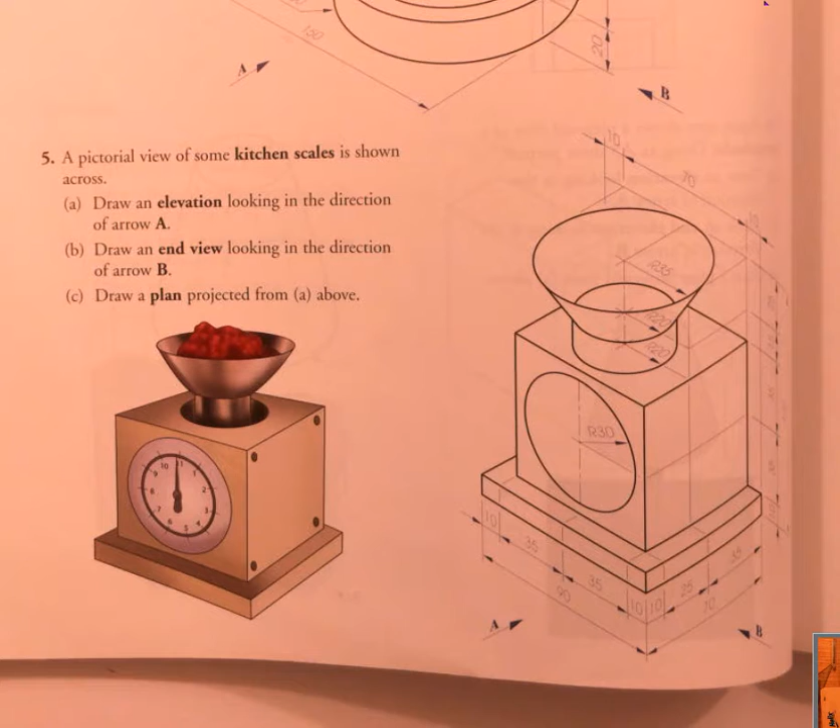Okay, we're going to do the orthographic projection of the question on page 118, question number 5. It says a pictorial view of some kitchen scales is shown across. Draw the elevation looking in the direction of arrow A, draw the end view looking in the direction of arrow B, and draw the plan projected from A above.

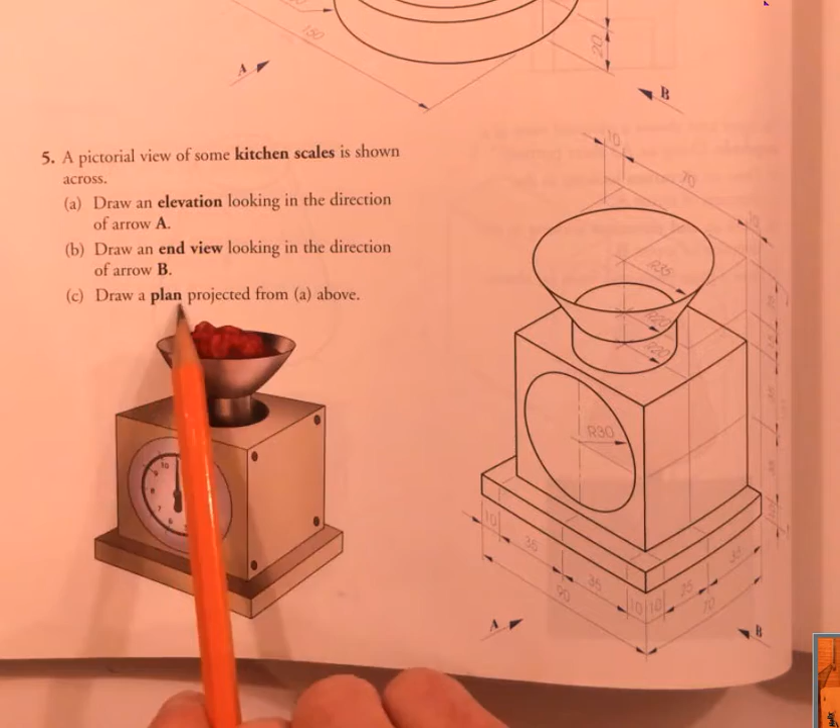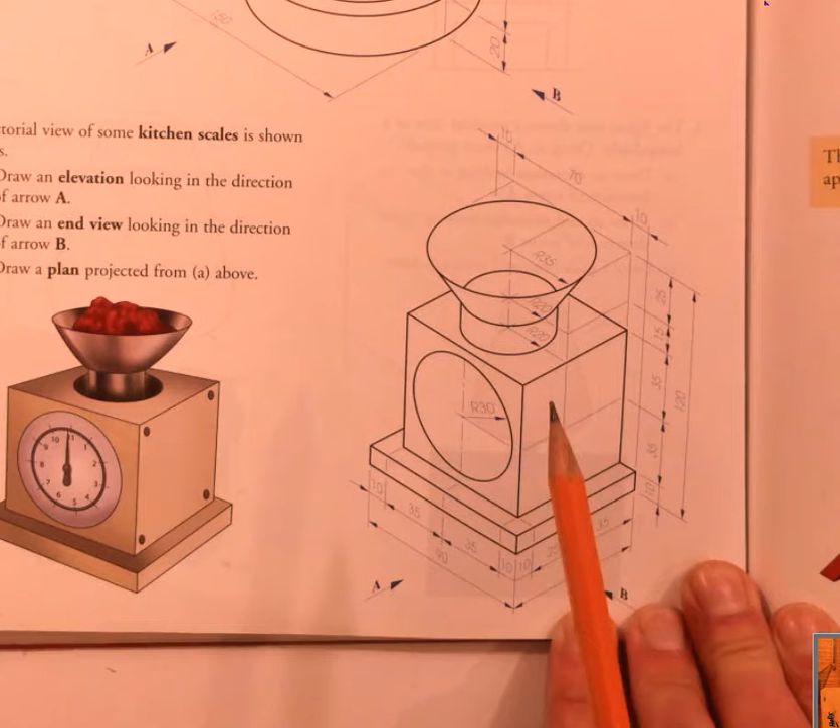So direction A, this is our elevation, meaning this is the front of the scales. It's saying the end view is looking in from the right hand side. So if I shine the torch in from the right hand side, the image is going to end up on the left. So when I get to this question, I'm going to have the elevation and then the end view is going to go to the left hand side.

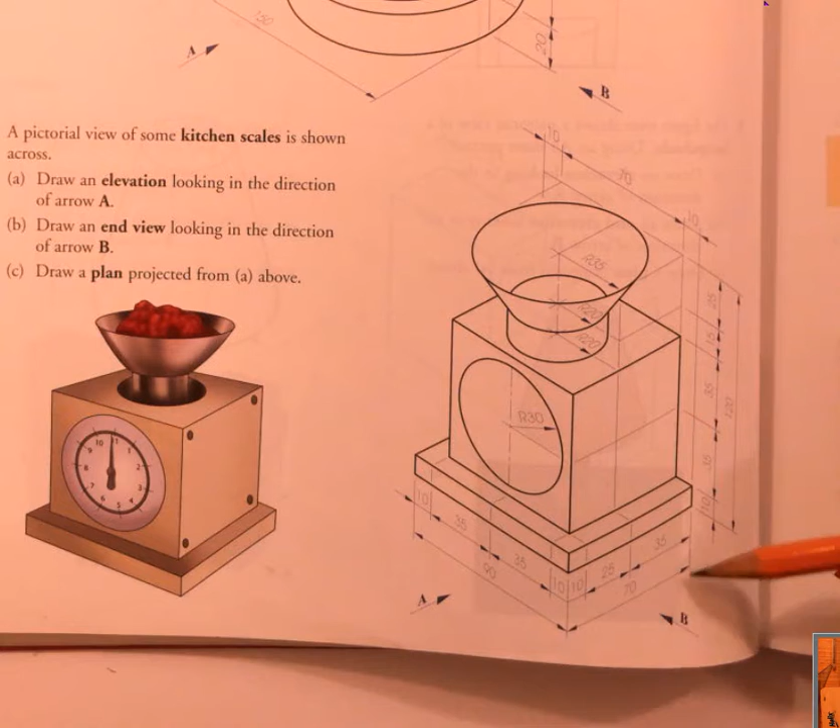The question then says draw a plan from A above. So I'm going to draw an elevation and plan, and my end view, we said, is going to go on the left. It's fairly straightforward to draw. It's 120 high overall, 90 millimeters wide, and overall 70 millimeters deep from front to back. So we can go about setting it up.

When we draw circles, we always draw them in the view where you see them as circles - I'll get more to that in a minute. I'm going to start off by setting up just the scales itself in elevation, plan and end view, in other words the box itself. This circular section I'm going to leave.

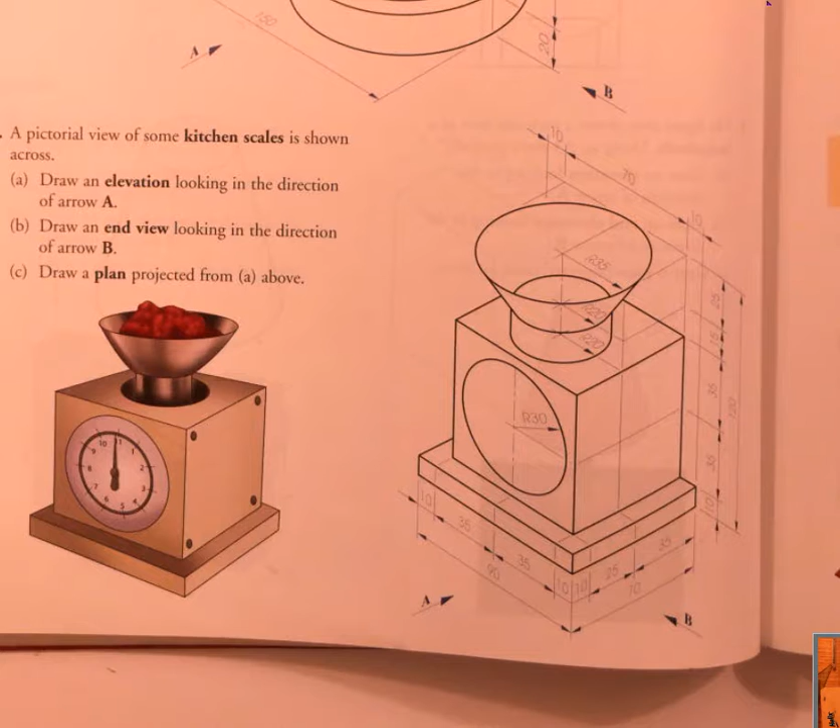Okay, so I've set up the main body of the scales in my elevation. I'm going to project that down to my plan view now, so I'm going to take all of my widths down to plan. I've got 4 lines to project down here.

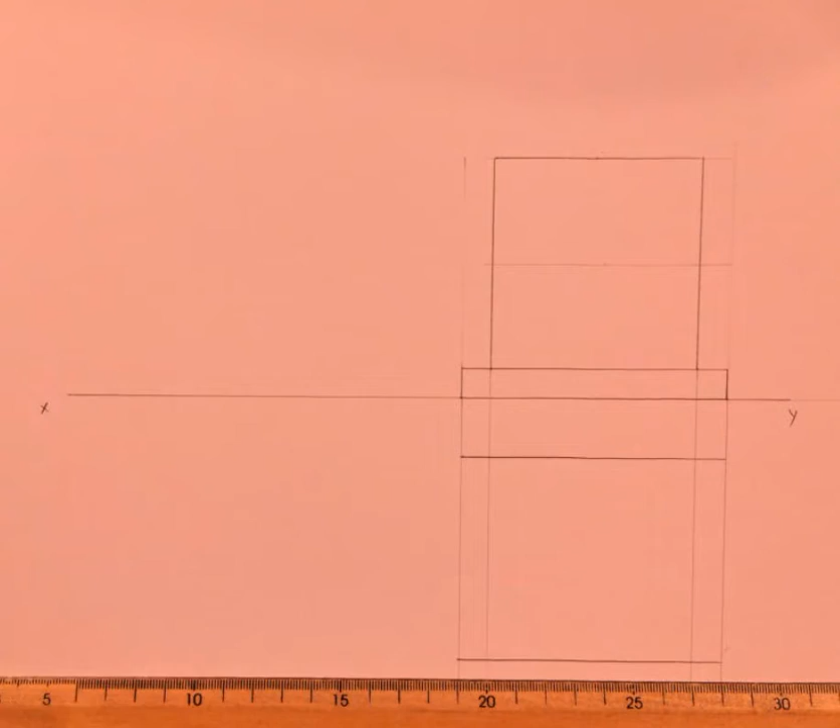We always step down 20 millimeters to start the plan, so that's the back of the plan. From back to front, it said the scales is 70 millimeters. So 90 wide by 70 - I've already got the width taken from elevation, so I can just draw it in. Here is my plan view of the base piece. The base, it said, was 70, which I measured from back to front, and we have the base.

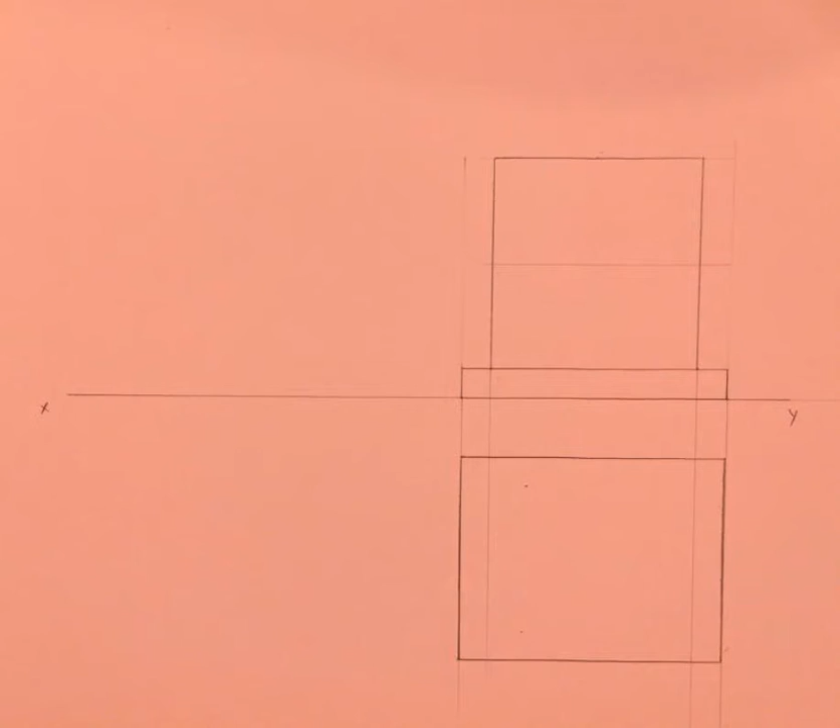The actual piece for the weighing scales is 10 millimeters smaller all the way around. So it's just a matter of measuring in 10, and I've got the 2 sides taken down from the elevation. So here is the outline of the main body of the scale. I've got the base in plan and the main body drawn in there.

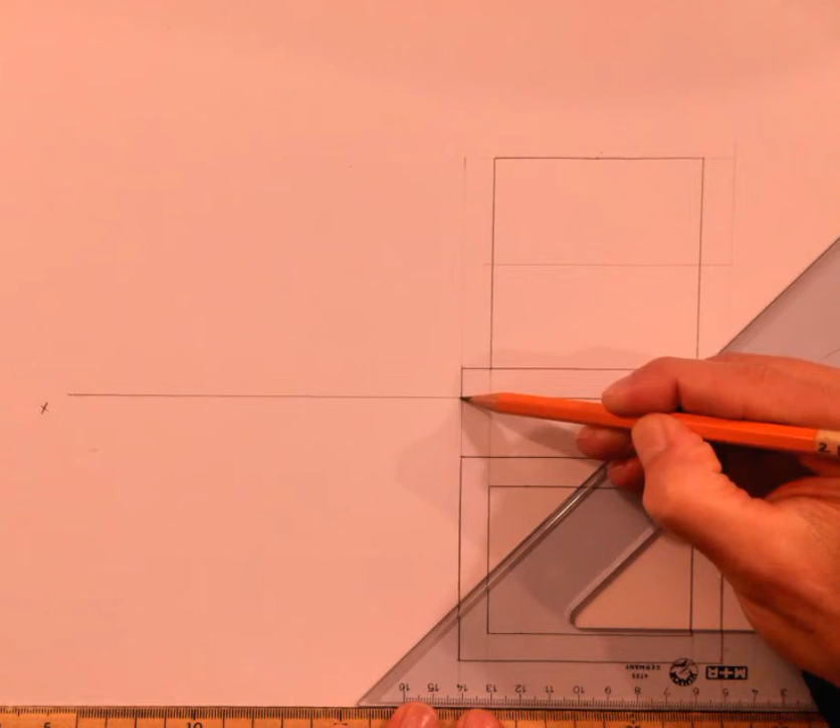Now we need to find those in the end view. I've left space on the left hand side for my end view. Again, the edge of the elevation and plan where it crosses the XY line, here it is - I'll draw it in again with a broken line. I'm going to take my heights from elevation and my width or depth from plan, from back to front. So the base is the first piece I'll set up.

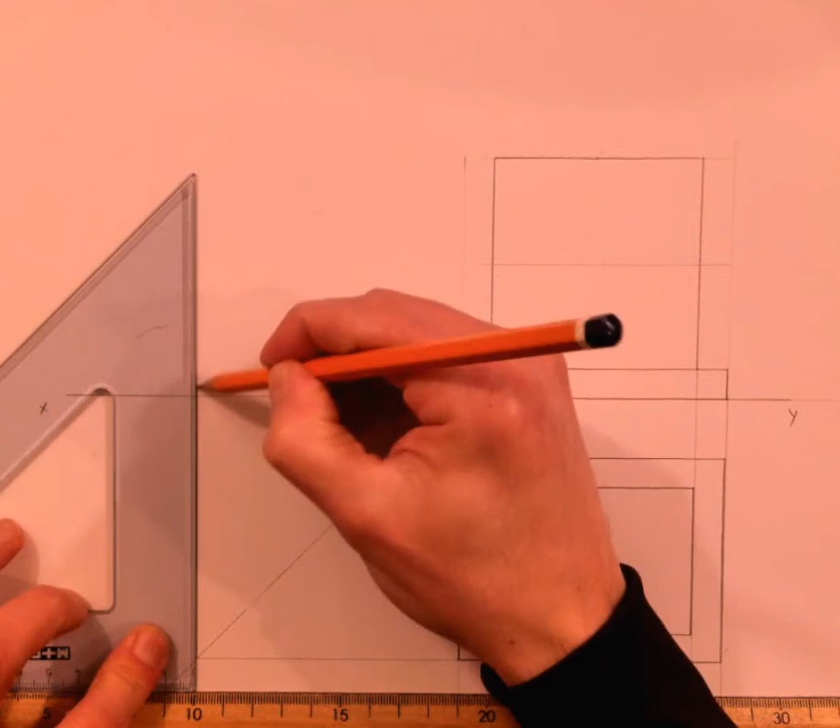I'll take the base out of my plan view across, and I'll take the back of the base across. I'll bring those up to elevation, and again I'm taking the height of the base - the base was 10 millimeters high. I'm going to take that across. And here is my base drawn in the end view.

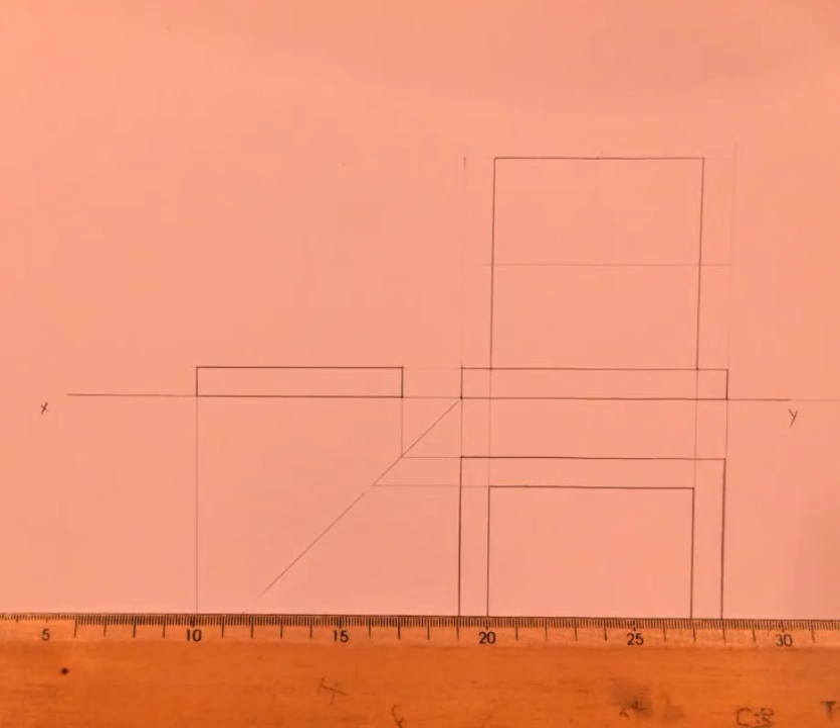So I've got the base set up. I need to set up this main body in the end view. I've got the main body here and here in plan, and again it's the same setup. I'll take my points out of plan - the front of that main body, the back of the main body - and bring those to elevation, up to elevation. So again, it's always where it hits that 45-degree line.

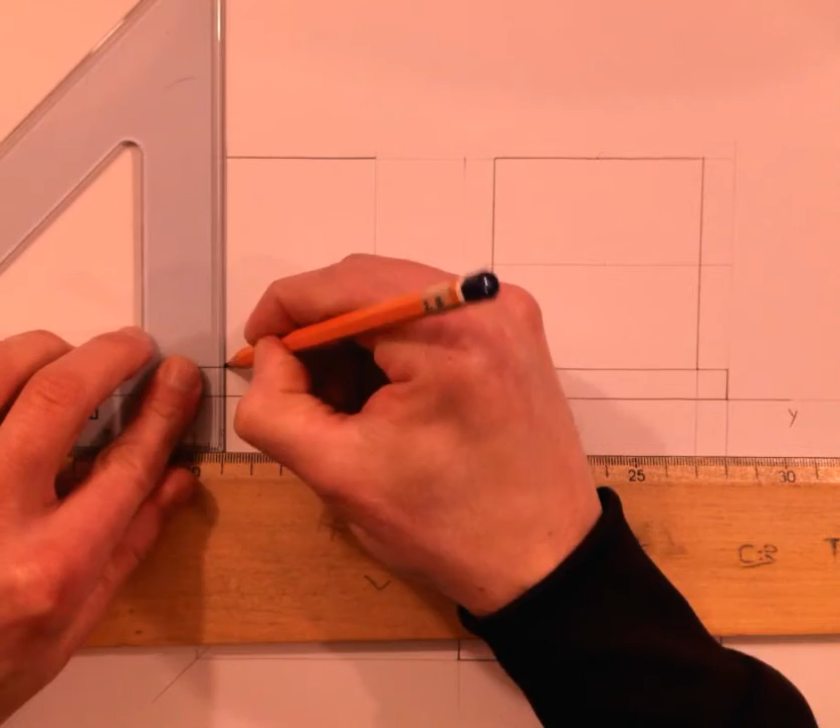Here it is, height of it, take it across. That gives me the height of the main body. So I've connected the 3 views together now properly. I've copied the depth, which was 50, up for this.

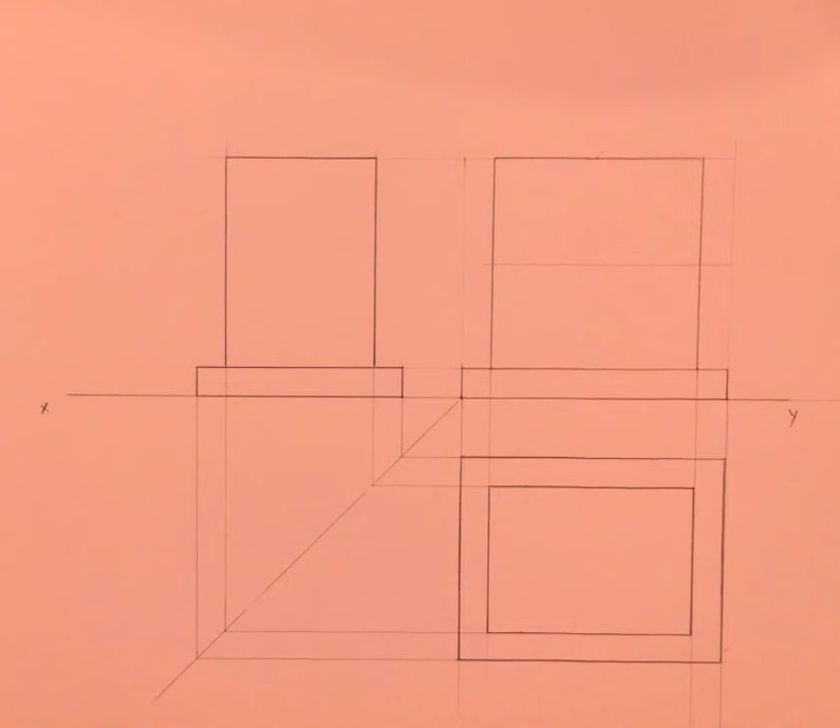Now it's a matter of drawing in the circular sections. The first circle I see is on the elevation, and it is radius 30 millimeters, in the center of this face. I've got 2 ways of finding the center - I can measure up half, which is 35, and measure in to get the center. But the handy way to find that middle is I can join the diagonal, so I'm just going to join the diagonal and join the diagonal. That gives me the center.

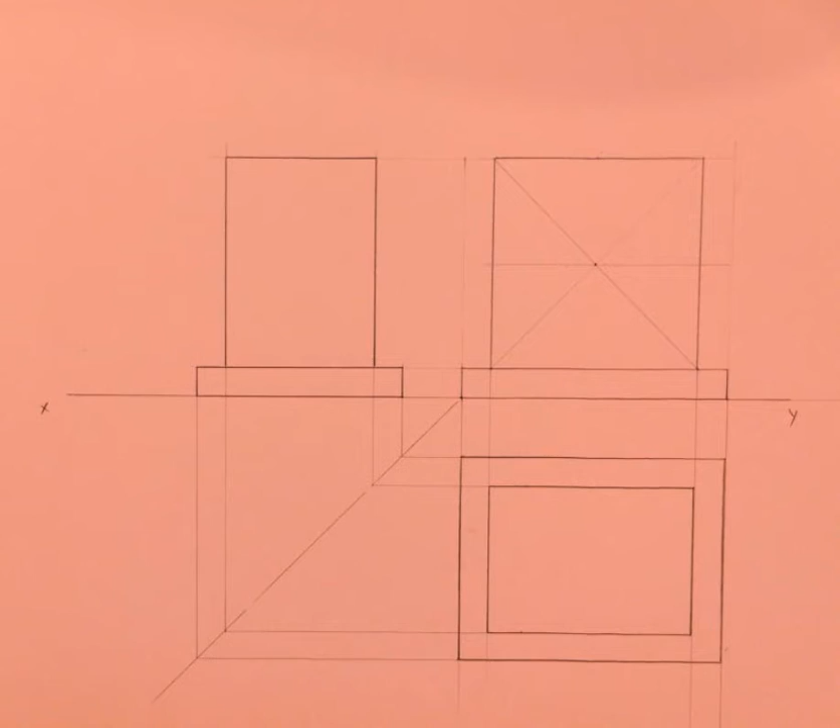That's our front end. I've got this top section here where we put all the ingredients into, but I'm not going to draw them in the elevation. I drew this circle here in elevation because it's the true shape. In other words, it looks like a circle. It's the only view I'm going to see that looking like a circle.

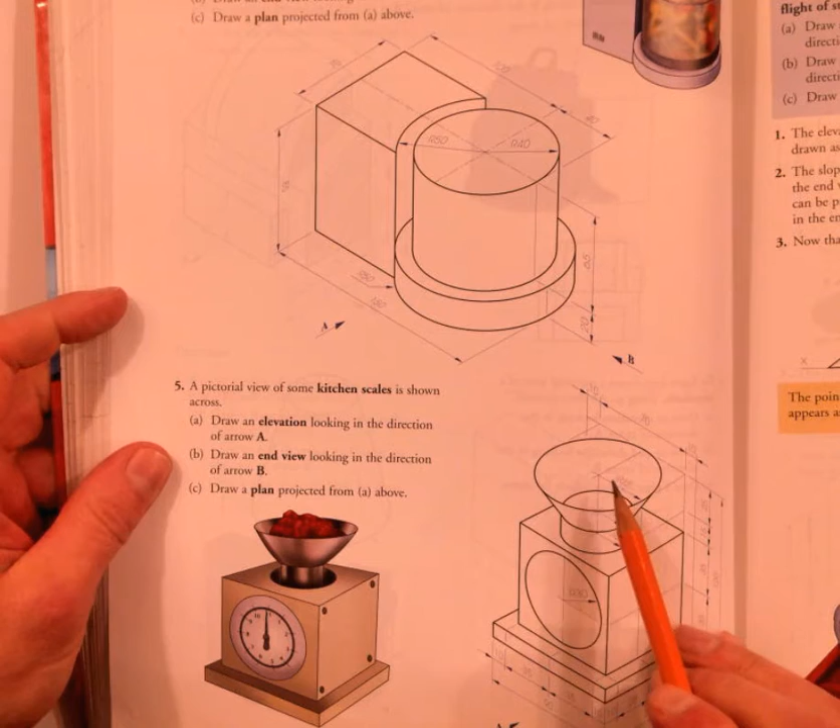When I come back to my question, the funnel shape here, I'm not going to see them as circles. I've got two circles, radius 35 and radius 20. I'm not going to see those as circles in elevation. I'm not going to see them as circles in end view. I'm going to see them as circles in the plan. That's where I'm going to draw them. So it's radius 35, radius 20.

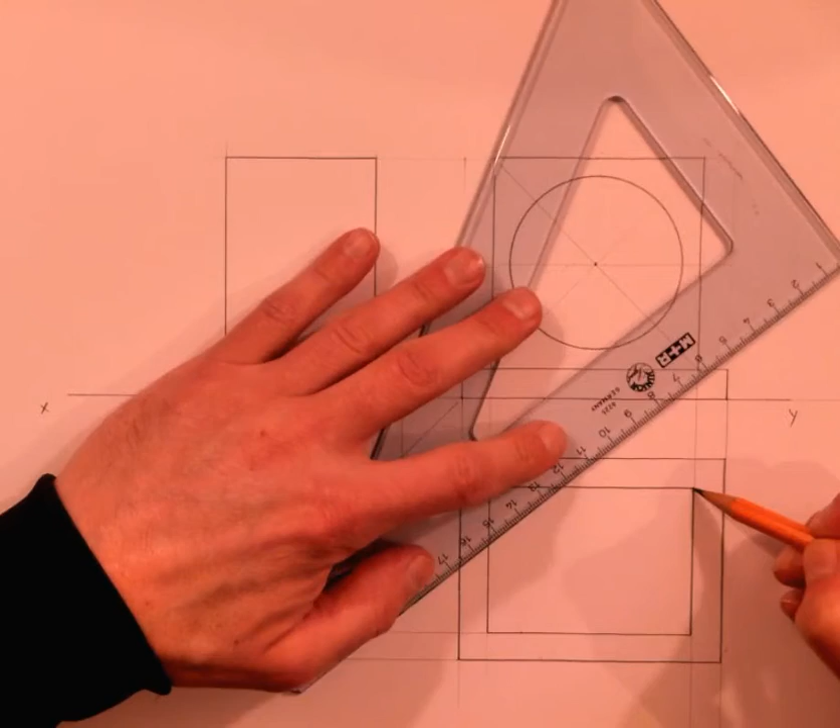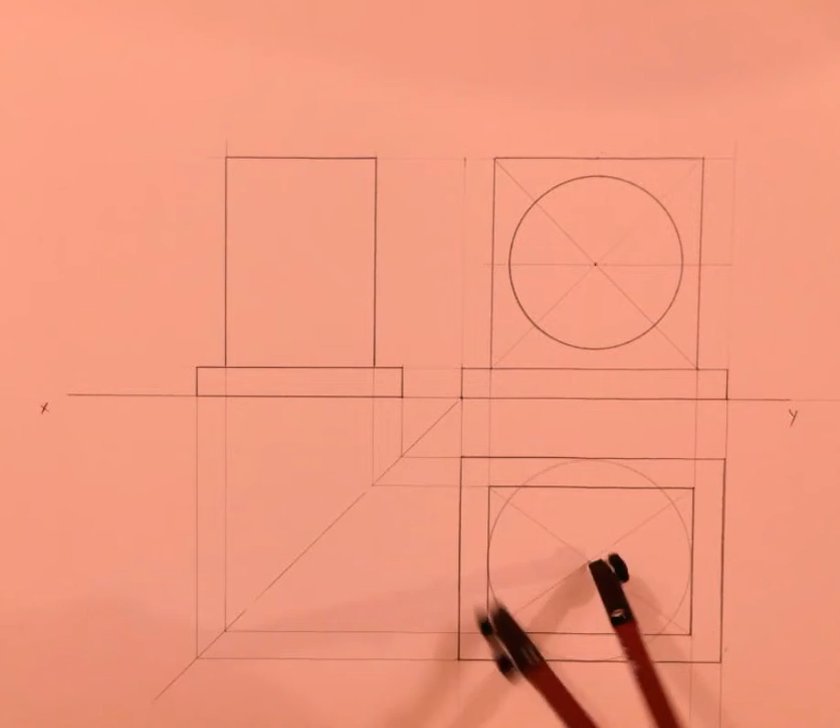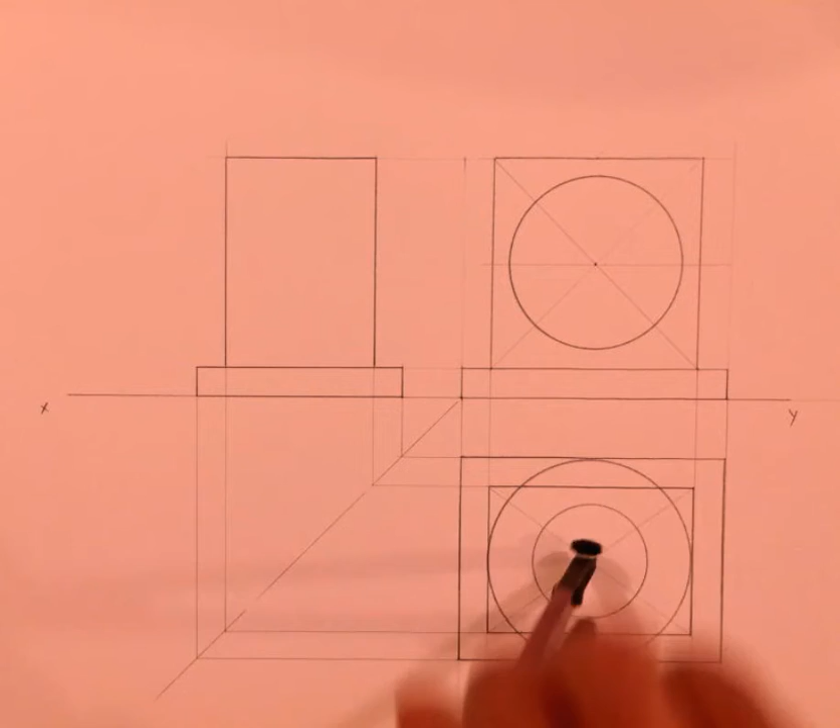So when I come down, again, they're in the center of the body. So I just come along, easy way to join, or to find the center, join my diagonals. Nice and lightly. Again, it's radius 35, so I'll take my radius 35, and radius 20. So those are my two circles in.

Now I'm going to take out these lines because you won't see them. I was only drawing them in dark so you could see them on the visual. Okay, so I've got my funnel section drawn in the plan view.

I'm going to bring that up to the elevation now, and my widths are going to be taken from the plan. So I'm going to put a little construction line across here, which is a center line. Again, it's darker than I should be making it, but I want you to be able to see it. I'll even have to go a little bit darker, I think.

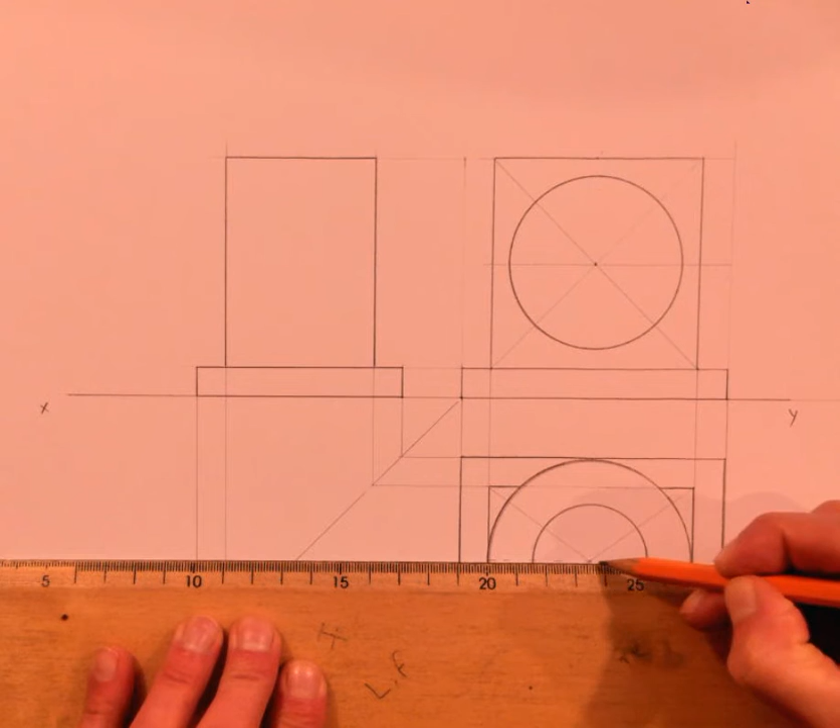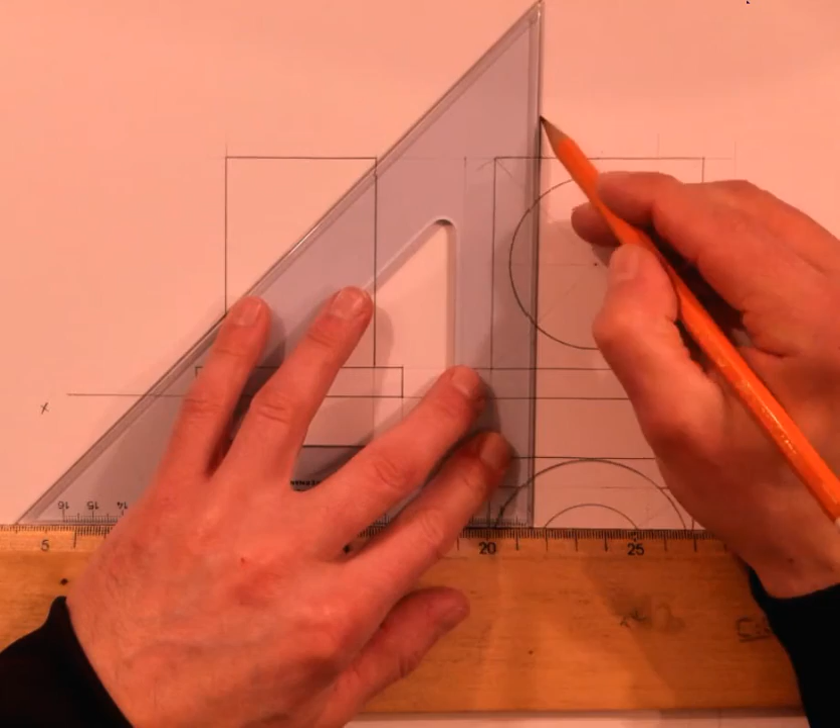So I'm putting a center line through the center of the circle. The width I'm going to take up is for the first part of the funnel, so the smaller section of the funnel. Here is one side of it, so the radius 20 section, and the other side of it. And the height of that in elevation, it said in the question, is 15 millimeters. So I come up, I projected up each side of the funnel and measure up 15 millimeters.

That allows me to draw in the funnel in the elevation. So this is the kind of base part of the funnel drawn in.

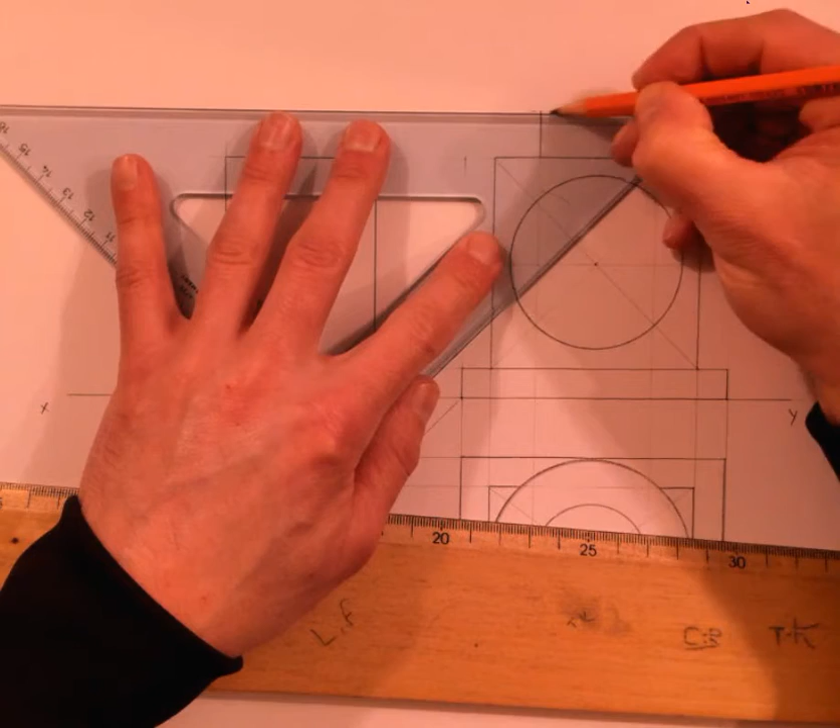The top of the funnel, the widest point, here it is, it was radius 35 in plan. I'm going to take those two points up as well, so the widest points. And use just a bigger set square. So I'm projecting that up, and projecting up.

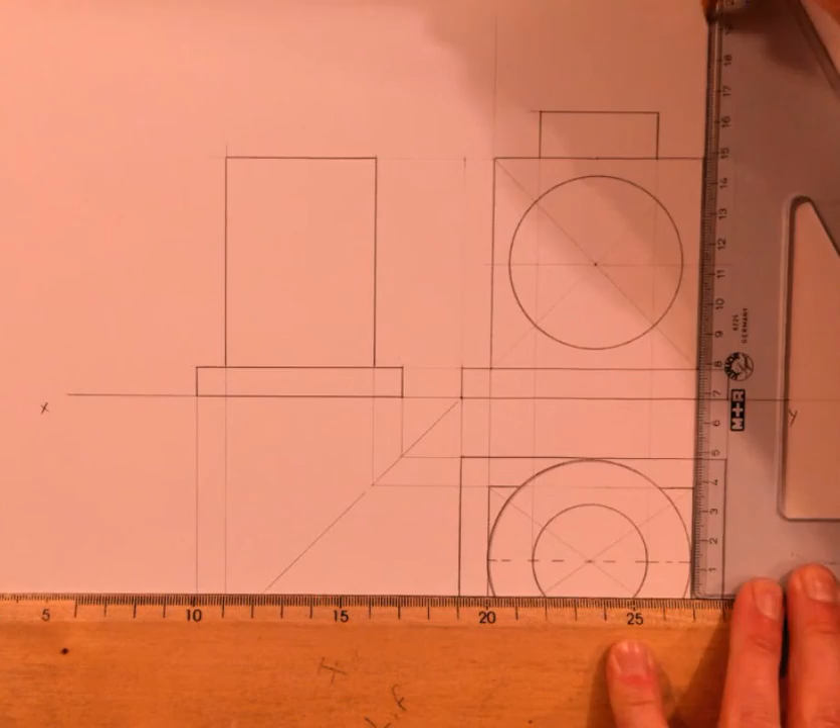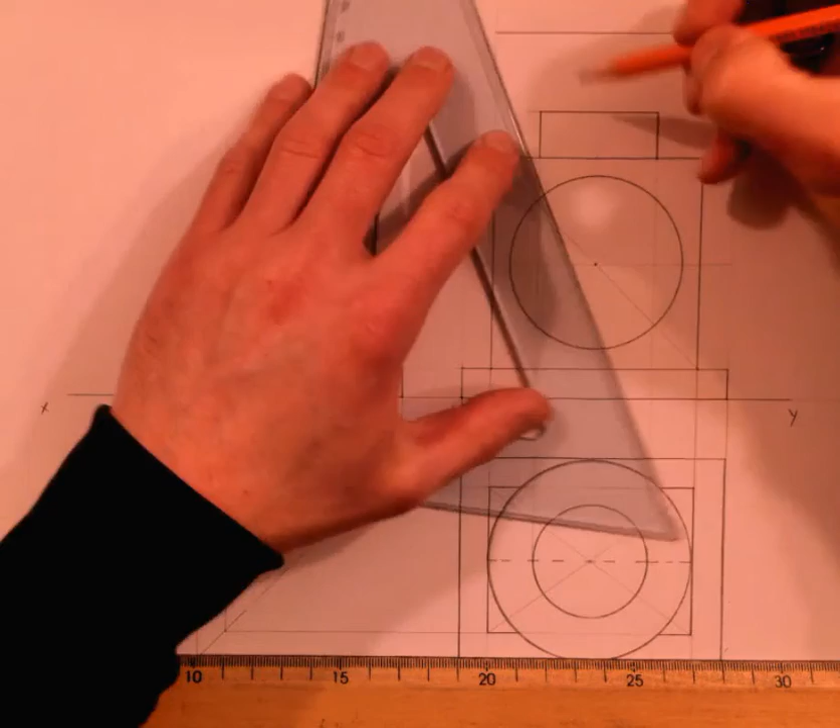And that was up 25 millimeters from the lower part. So up 15 and then up 25, and then what that has given me is the top of the funnel. Here's the top of the funnel, join back down. I've got the funnel in elevation.

Now I need to come along, draw the funnel in end view. I'm going to take the heights of the funnel. So my 15 will come across, my 25 will come across. So I've taken the height of the lower part and the upper part of the funnel across.

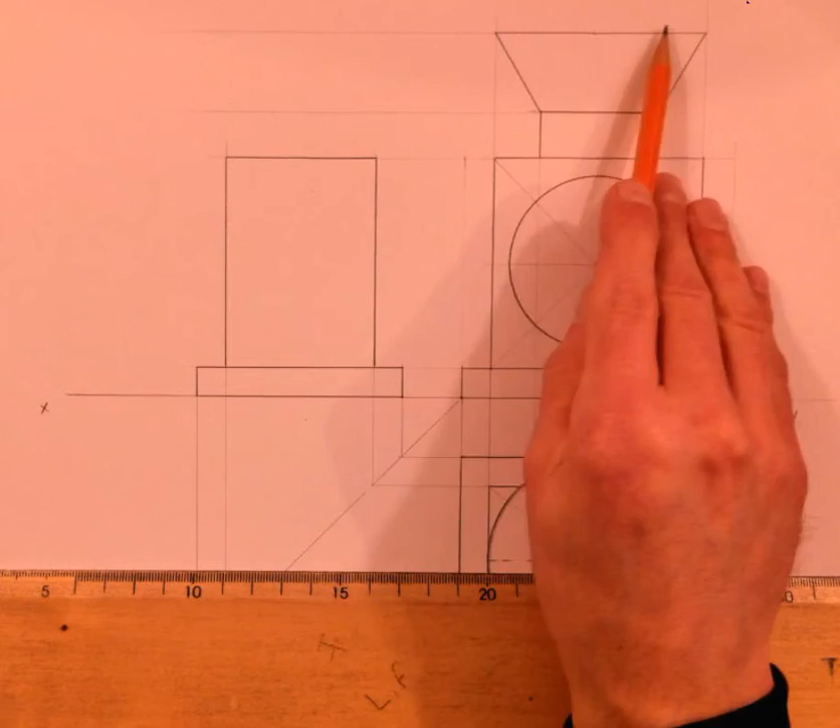I'm going to take those out of plan now. Means I'm going to need a center line in the opposite direction. Remember, it's a light center line. I'm just drawing it dark so you can see it on the visualizer.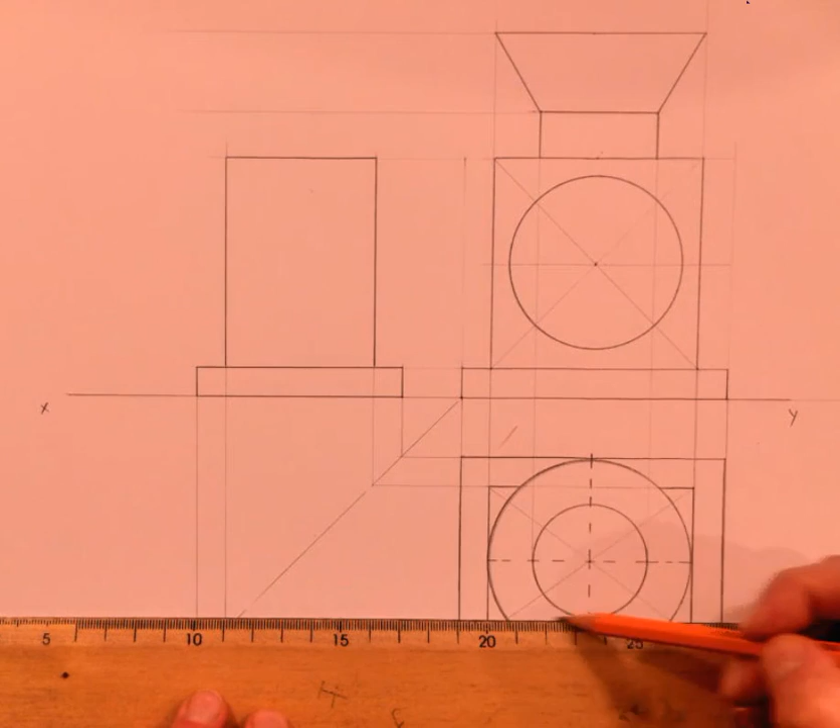I've got my width here now, or the depth as they're called. So I'll take the narrow one again to start with, the narrow point and the narrow point, and they're going to come up into the end elevation. So up it comes, and then the second one up into the end elevation.

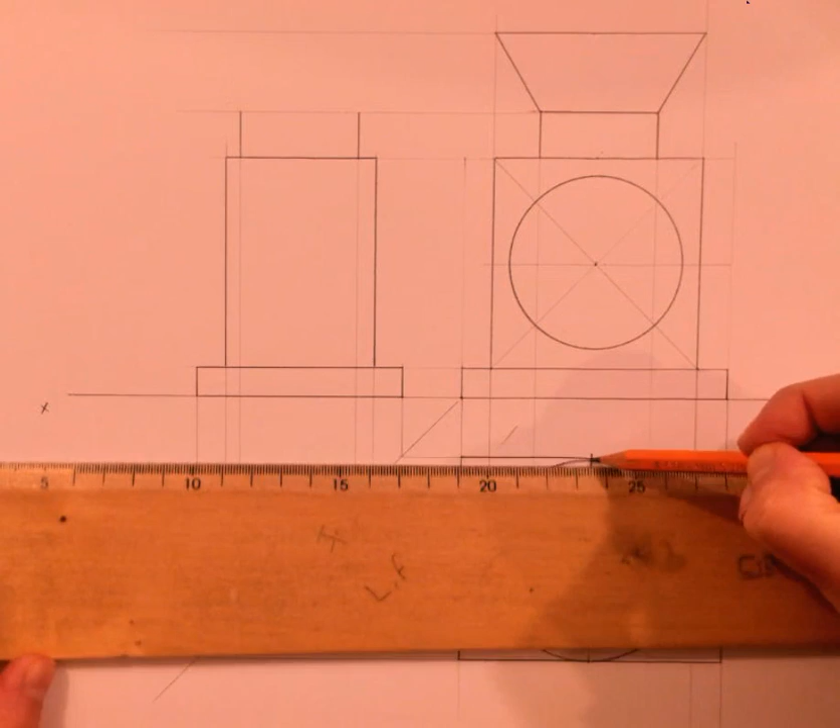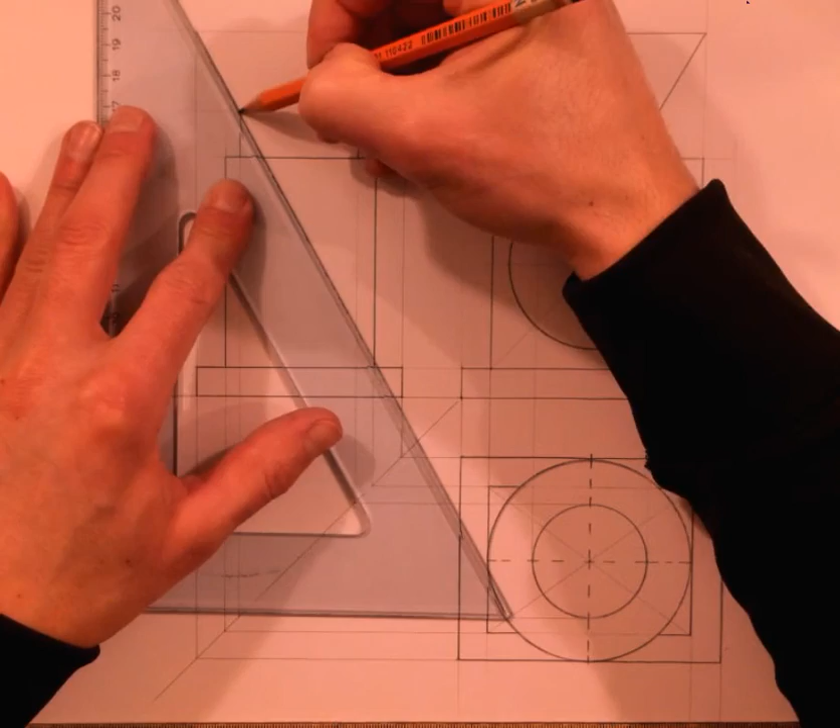Likewise for the wider part, here's the widest part, over and up out of my plan, and again the wider point over and up out of the plan. So they line up with the base. Gives me the point in end view. That lets me draw in the shape of the funnel.

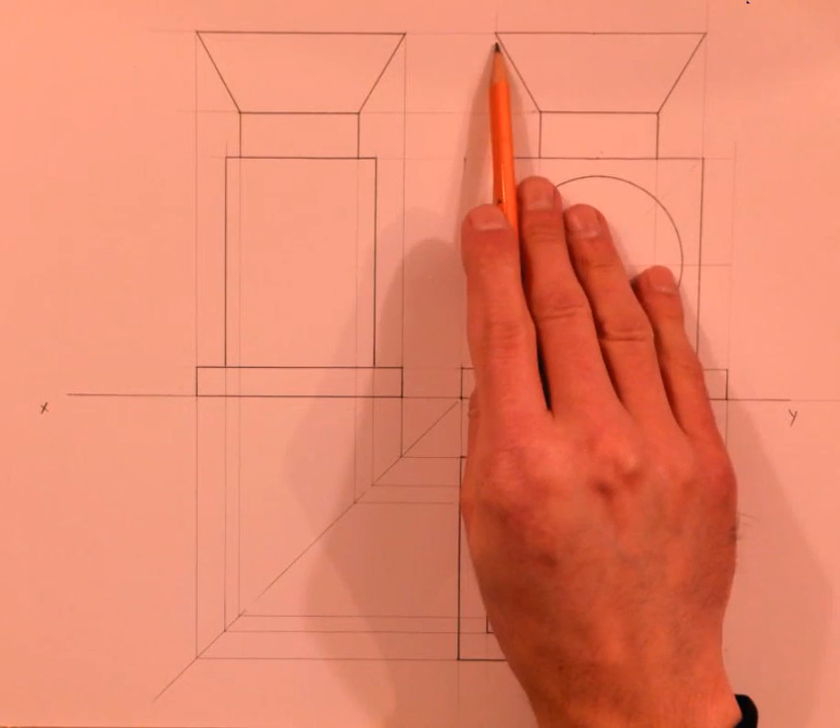And that is the correct way to draw the elevation and plan in end view there. So again, we always draw circles in the view where we see them as circles. That big circle looks like a line in end view, and it looks like a line in elevation. It's only when I look at it in the plan that it looks like a circle. Likewise, this circle looks like a line in elevation, looks like a line in end elevation.